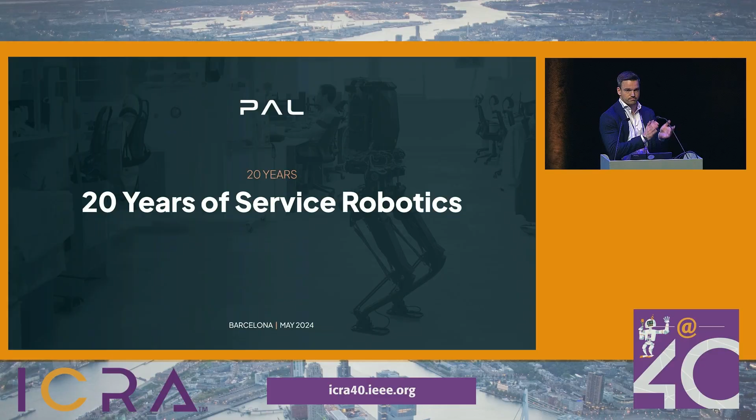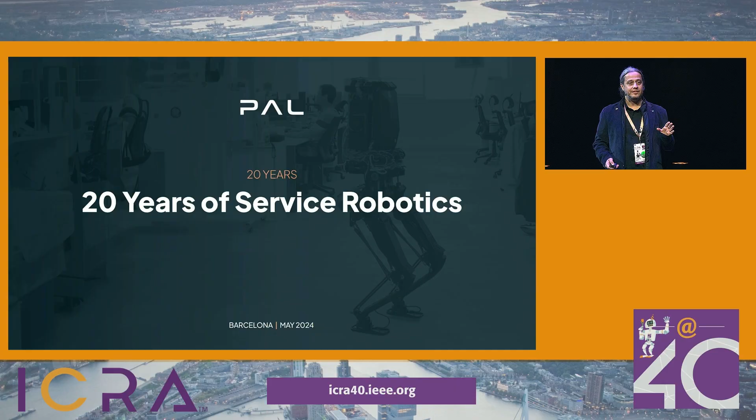Hi guys, you have a problem today. I have 20 minutes for speaking, so take your time. I hope that you had coffee, but yes, the first slide is also very important. It's 20 years that we are doing robotics, thanks to you. So I will try to make marketing messages for you, for sure, but also explain some robots and why we...

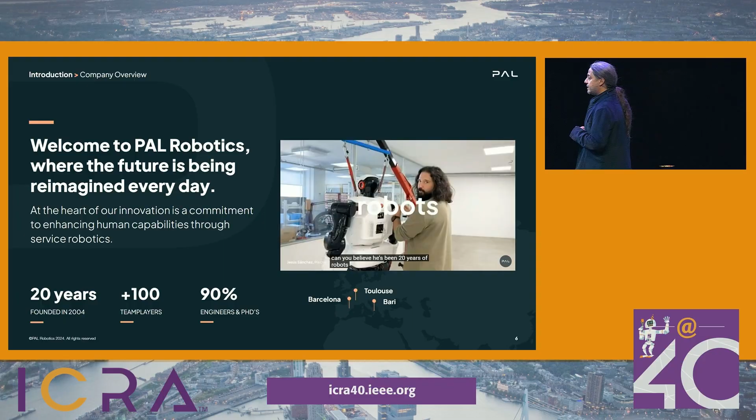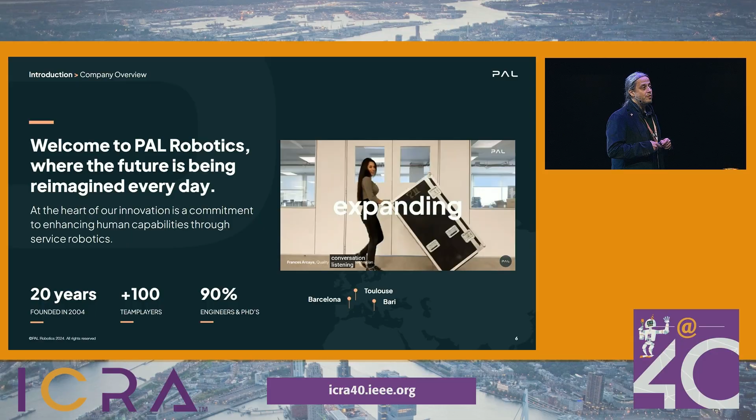So the headquarters is in Barcelona. We are around 100 engineers, but we opened in 2020, so 4 years ago, a branch in Toulouse in order to have a joint lab with LAAS, a lab called Dynamograde, in order to push dynamic walking with biped robots. And last year, in September, we opened even in Bari. Bari, for who doesn't know, is in Puglia, the heel of the boot of Italy. And we try to do, even in Italy, a lot of development of this kind of robots.

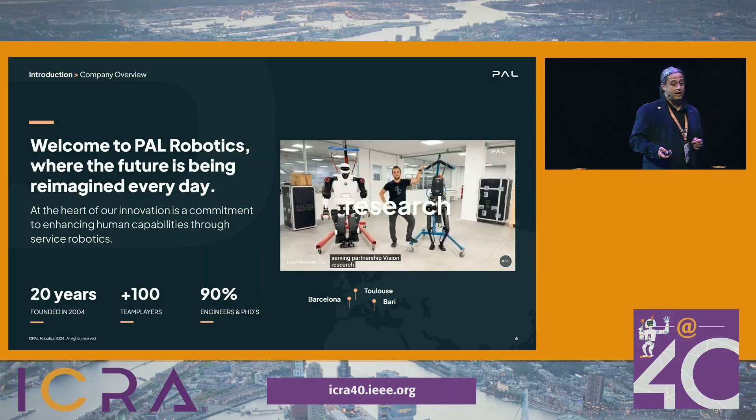For sure, we are not only doing research, but we are trying to cover the gap from university to the real world. And we focus our attention on service robotics. So the idea is not only to work in industry, when we have robots that have to be in a cage, but doing robots that could collaborate and work with humans.

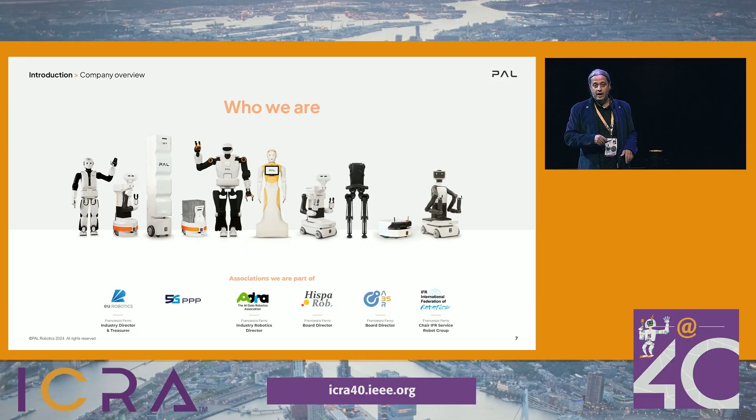These are the developments and the robots that we still have in our portfolio, and here you can see some of them, probably you have seen for real during these years. Another important mention is that I'm also part of different associations here in Europe. First of all, euRobotics, we will have later on a talk about this association, but also ADRA, and in Spain AER and HispaRob, and IFR, the International Federation of Robotics. We are doing a lot of things.

So this slide is very important to understand what we are doing. We have 3 different business units: one is mobile interaction, the other is legged robots, and the other is intralogistics robots. Video sometimes took time to download from internet, but all this information you have seen is on YouTube, so you can check the video and see later what we did.

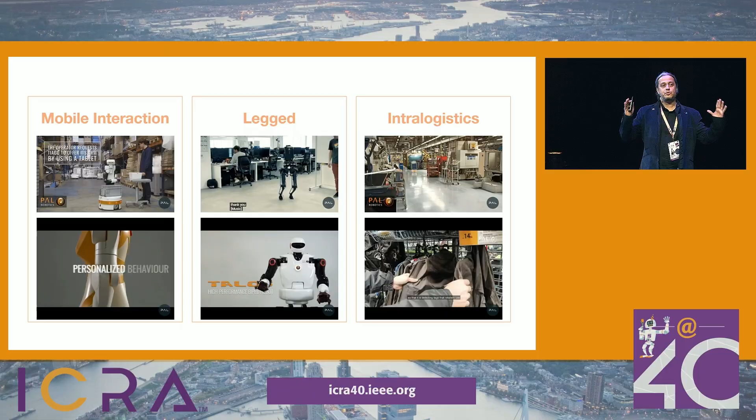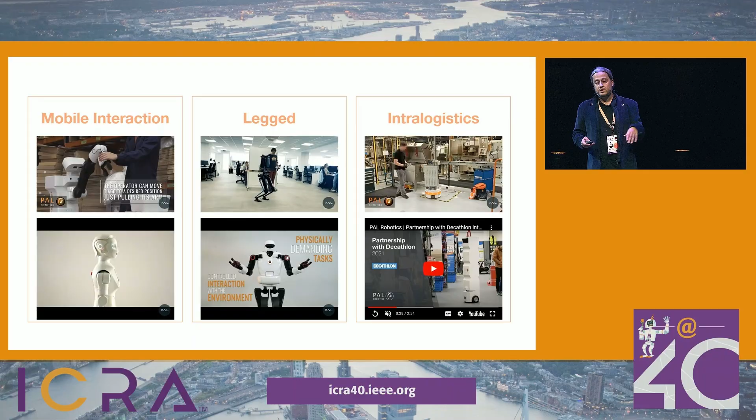Why mobile interaction? Mobile interaction is probably the biggest research point in our company, that is social robotics, but also collaborative robotics, working not only in a service domain but even in industry. So the idea is to have the Tiago robots that we'll see later, the Ari robots, then we have the legged robots with Talos and Kangaroo, and from an intralogistics point of view, we have mobile bases, and also a good success in this business unit, the Stockbot project.

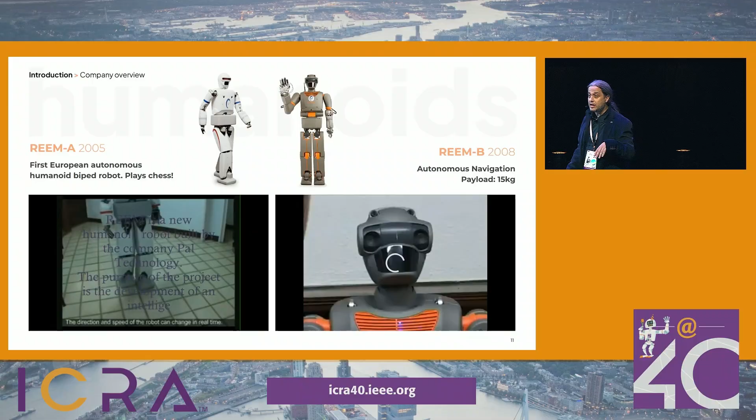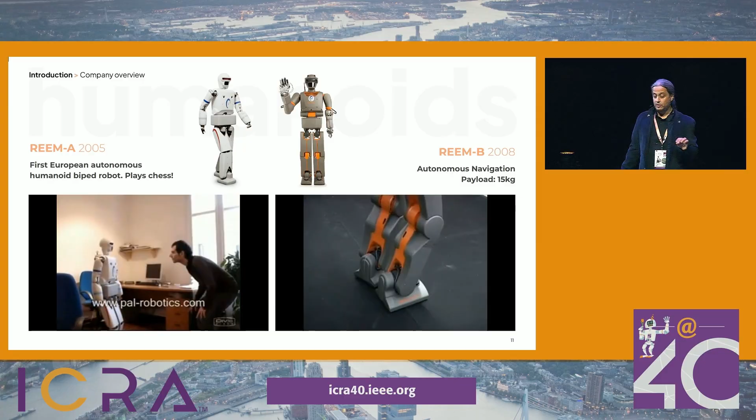In 2005, we had one biped humanoid robot that was walking and playing chess, called REEM-A, thanks to a project we started with a company in UAE that paid all the developments. And we did a lot of great development of these robots. In a few minutes, you can probably see me some years ago with long hair, okay? And the REEM-B was just the second robot that we did.

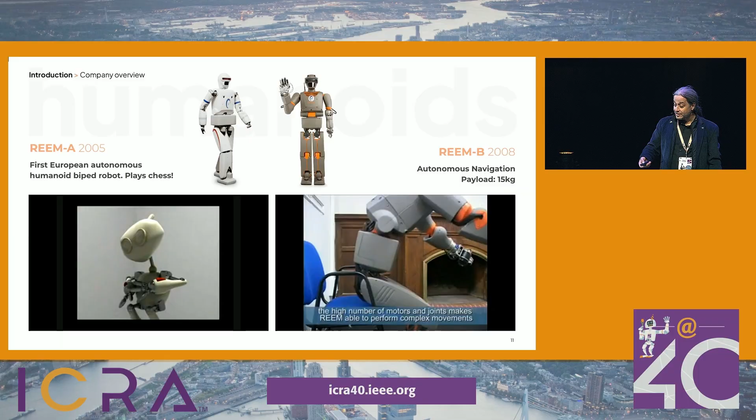This is me 20 years ago. I didn't have so much white hair like now. And the REEM-B was the advanced biped robot that we did in 2008.

After that, we also did our first wheeled robots. It's called REEM-H and REEM. That was 2 years later, sorry, I don't know.

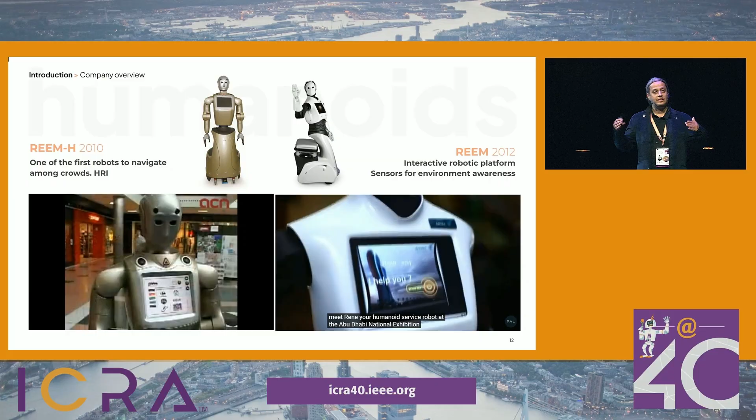Here there were some videos that I don't know if they will start. But the idea was to have these robots like a dynamic information point that could work inside a shopping mall. So what we did was just put the robot in a real environment, making testing. We learned a lot, and most of the time, it was something that I've seen this morning in some slides, that robots failed all the time.

So this is the truth. The idea is to try to make the best that we can in order to have more application of these robots, and not only robotics for robotics.

Thanks to that, I just entered a collaborative project because we understood that having a robot in one year, like some companies just said, is just a utopia. So what we know is that we have to collaborate in order to make the proper application for these robots and work in the real world. What does it mean, real world?

We just made this kind of categorization. We have four different structures. We have R&D, so we still need to research, not only from a software point of view, but a lot of hardware point of view, in order to make better robots that can collaborate more and do better stuff. But then we don't want to miss the real market. So we have healthcare use cases, industry use cases, and we also have agri-food use cases.

So we started the first project we had in 2013, Factory in a Day, and we had a collaboration with a lot of companies and a lot of universities.

From a healthcare point of view, I'll highlight some projects, like the Spring project that just finished last month, I think. The idea is to have a social robot that could stay in a hospital. The problem is not only the navigation, but also the human-robot interaction, having a lot of persons that would like to interact with the robot. So who has the attention of the robots? These are some of the challenges that we had.

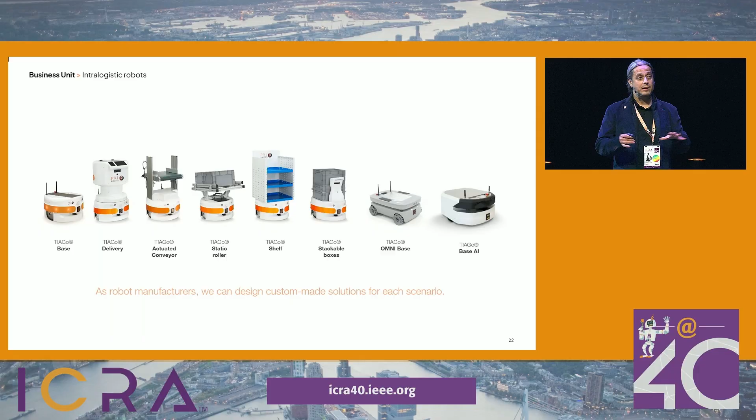So now let's enter a little bit more in detail about our product, about mobile bases. The idea is to move things around, but not to compete with big trucks that are moving tons. The idea is to have a small footprint that can move around without any problem, in an easy way.

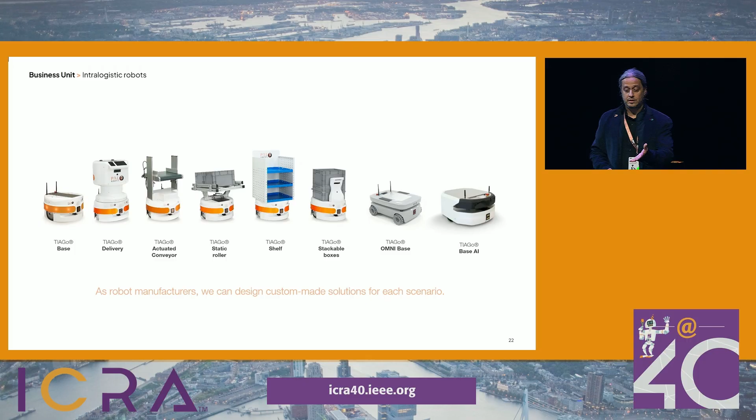So our autonomous navigation software is useful here, not only in industry, but also in warehousing, hotels, and other places with people around.

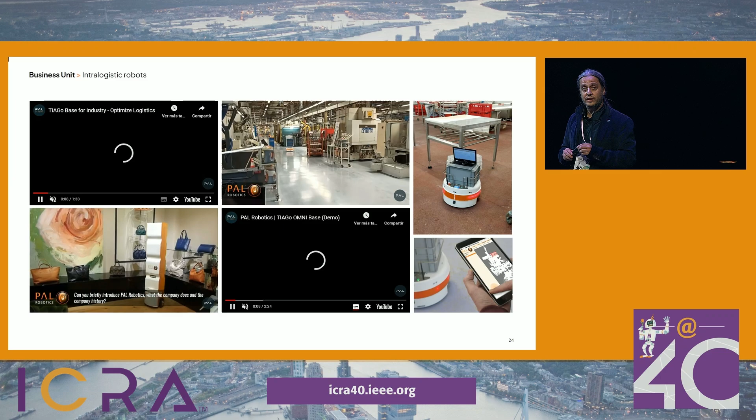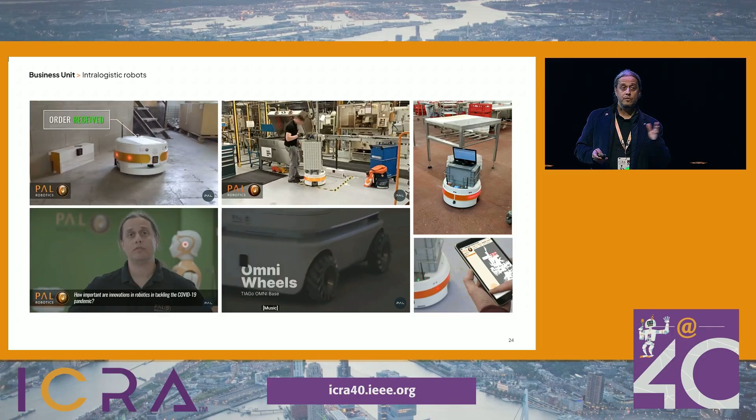Here you have some examples. One that worked quite well was thanks to the digital innovation hub Hero, from the Netherlands. We had the opportunity to work with hospitals to have robots that can move analysis samples inside the hospitals in an easy way.

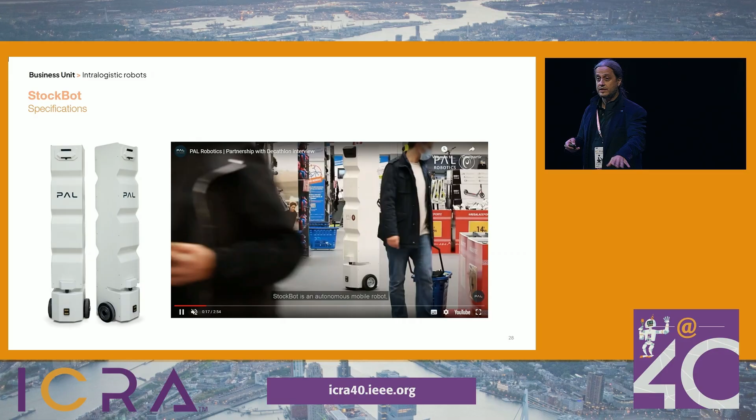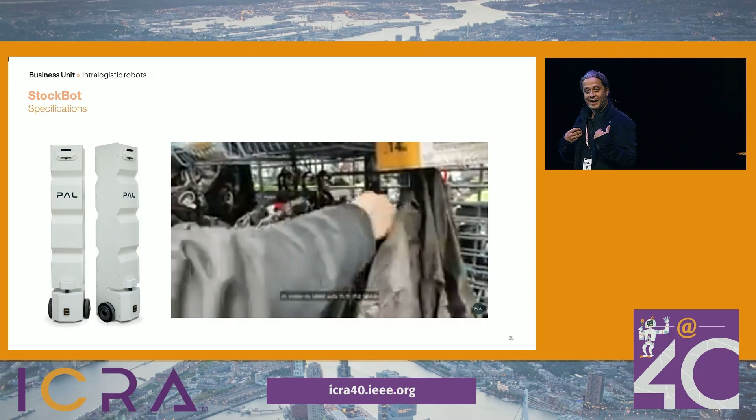But a part of the joke, Stockbot. Stockbot, like I said before, is an important robot that does autonomous inventory every day. I'll show a few seconds of this video, which you can find online. It was done by Decathlon, so it's not our video. We had no right to manipulate it, and they speak better than we can about our robots. So the idea is to provide services, to make things easier and faster in an efficient way.

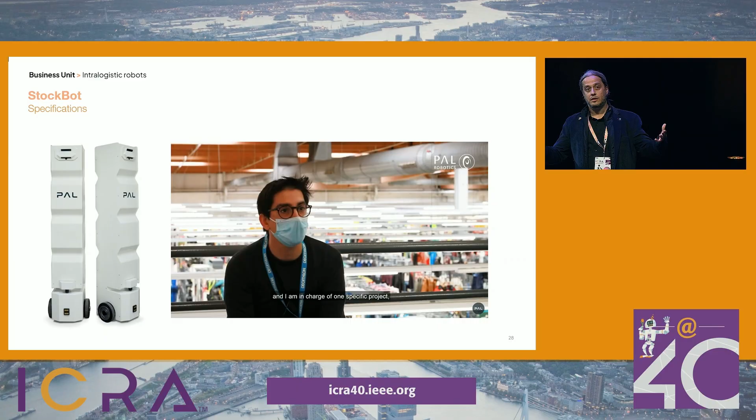The robot has an RFID antenna, but we also have a vision system. You can check the clothes in the retail shop in 3D, so you always know where your things are.

I have to go fast because I already took all the time. The functionality you can imagine is tremendous - you can even use business intelligence to know where to put things. This is one very good, real solution for different use cases. We're not applying this only to retail, we're working in different other domains too. Here is the main benefit, but I'll skip it.

You can check that on the website, because I'd like to introduce Kangaroo, our new biped robot. A lot of US companies are speaking about development of these robots, and Eastern world countries too, and we have our solution, the Kangaroo.

Probably you've seen it - last time we showed it at ICRA in London, and we are hard at work on this, completely finishing this platform. At the moment the robot is without the head, because we'd like to make the grasping in front and in the back, and also move things from one side to the other.

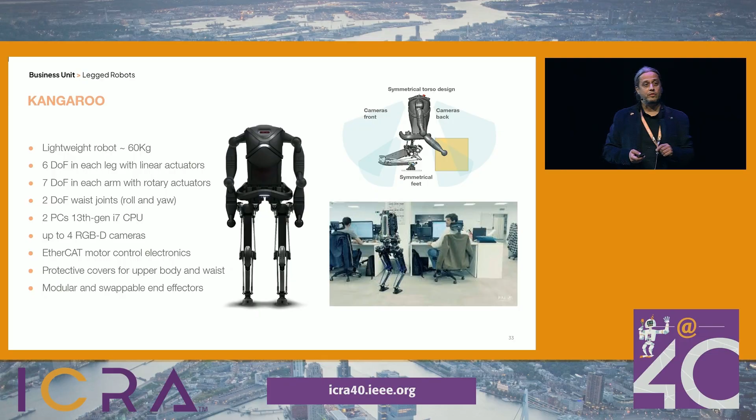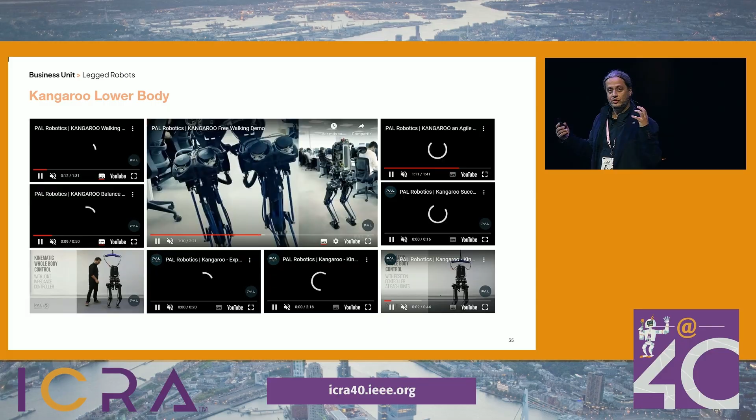I don't know why the video isn't starting, but it shows moving objects in a different way from humans. I know from a human-robot interaction perspective it could seem strange to see a biped robot without a head, but from a technological point of view it's not something super strange.

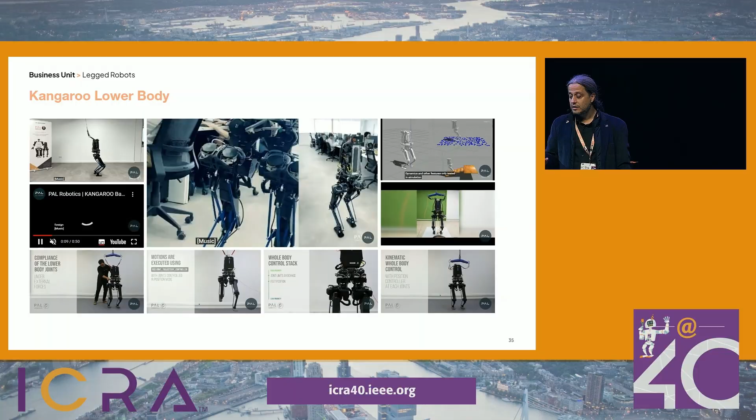Here you can see the robot moving in different environments, only the lower body so far. We're just finishing putting in the arms, the same arms you'll see now in the other robots, the Tiago.

So now we'll show the Tiago Pro robot, the evolution of the Tiago you've seen. You can also see in our booth one Tiago we call Tiago Plus Plus, because it has 2 arms.

Usually a video starts here if I find the right button. Okay, I skipped the video, I'm sorry. But time is going.

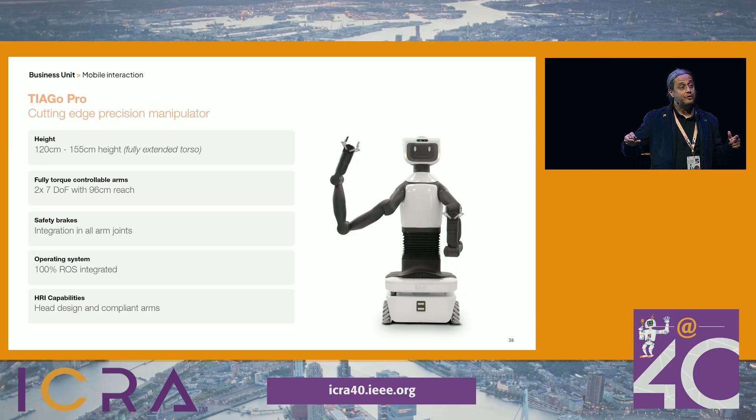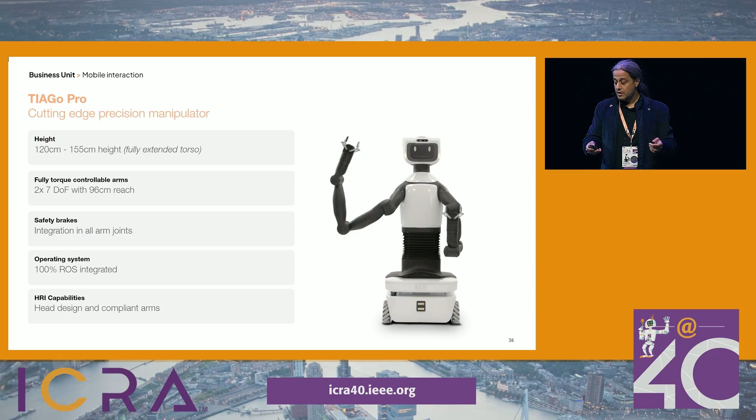The idea of this robot is to have a long arm. We made a very big workspace in order to take things from the floor and reach up to 1.80 meters. The difference with the first Tiago you've seen, and seen in our booth, is that we also have brakes and series elastic actuators in the arms, so we have completely force-controlled arms for these robots. The idea is to use it in factories, in industry, but also in healthcare.

To do this, we developed a lot of software, because up to now I've only spoken about hardware, but more than half of the company are software developers, and quite good ones.

And we just made everything with a web user interface, so you don't have to program in different languages, but just use a browser in order to use our software. We also have what we call web GUI, with different modules you can use easily on your mobile phone, a tablet, or a PC, wherever you are located around the world.

About software development, I'll speak a little about open source, but the most important thing is our impedance control and whole body control that we developed in a full robot, like the Talos robot. You can see a lot of this. And advanced navigation. For human-robot interaction, we created the infrastructure called ROS4HRI, which is completely open source. It's on the GitHub of ROS, so you can use it instead of reinventing another architecture for human-robot interaction.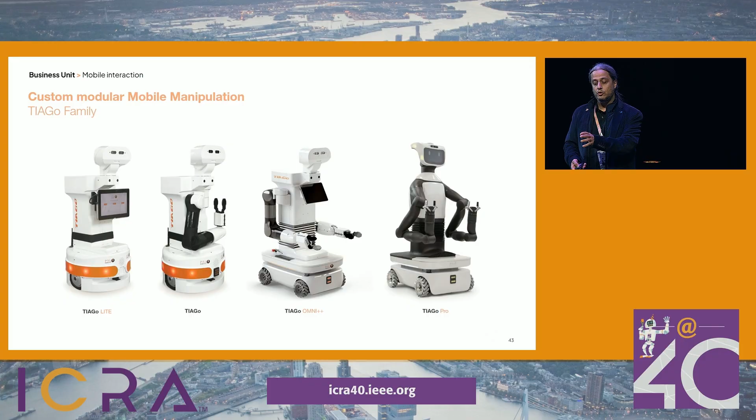From the customization of Tiago, you can see the evolution here. You have robots without an arm, with one arm, with two arms, and the new one with brakes and serial electric actuators. We even have a bundle of stuff. So now, before the end of the year, we're going crazy and selling everything.

Another thing we showed in Sevilla this week was the Tiago Head Pro. We added the new head to the Tiago Pro, and we have a bundle especially for social development. The idea is to have a very easy plug-and-play platform for research and education, and we're using it a lot for healthcare.

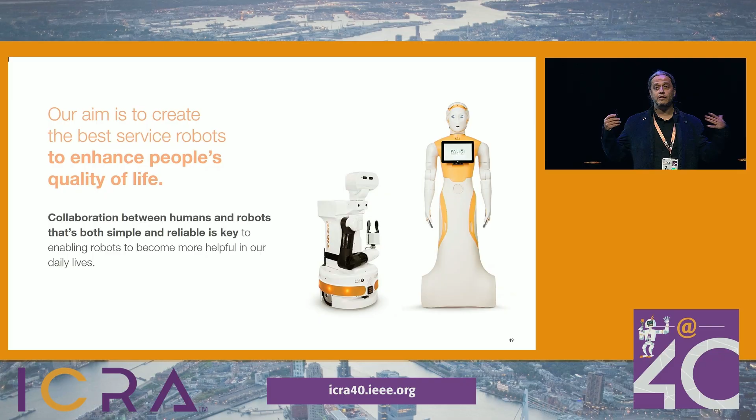I think the time is finishing, so working together is super important. Like I always say, we have to use robotics to improve the quality of life. We have to help people thanks to these developments. This is our mission and our vision, and in order to do this, we have to work together. So if anyone is interested, just drop us an email.

I have to finally conclude by thanking the beautiful team we created in Barcelona that is sharing this dream. All together, we are doing a lot of things. So please help us make better robots and a better society. Thank you.

Wow, that was much quicker than you said you would be. Yes, and we also have another 56 different slides of stuff. Bravo. Thanks very much, Francesco.

Are there any questions? We have time for a few questions. I cannot see very much. It's difficult to do questions to industry. One over there. There's one there.

Awesome, thank you for the talk. You mentioned open sourcing quite a bit of the software that you've developed as a company. I'm curious to know what your ideological preferences are towards what you believe industry's role is in robotics, specifically when it comes to open source, and how you decide what you open source versus what you close source.

Good question. On one side, we trust in open source, even though it could be a problem, because someone else can create another company and just copy and do better things than you with the same code. But on the other side, we've seen that especially in big industry, they ask us for open source because most of the time they had a specific development and then nobody was able to continue it because of decisions that were too specific. For us, at the beginning, there was no ROS. We started in 2004, and ROS didn't exist yet. At the time it was Player Stage, for those who remember that, and other middleware. We created our own ROS from scratch in order to make the biped robot that we've seen working.